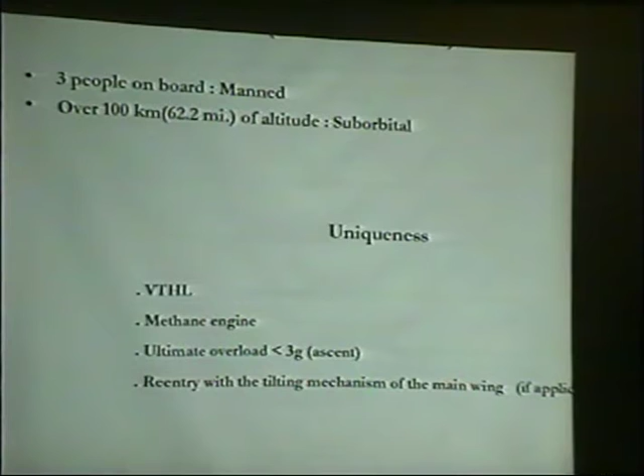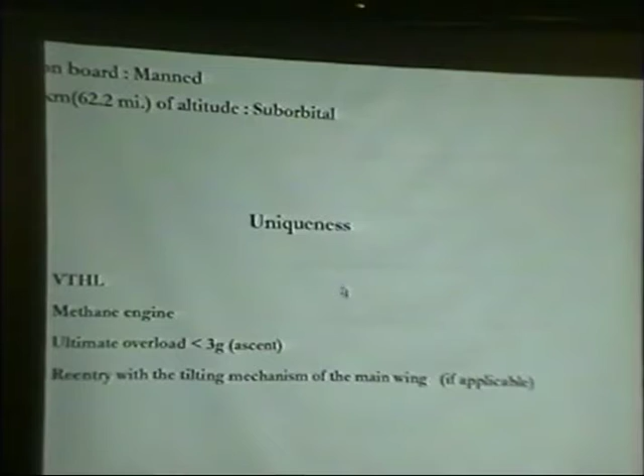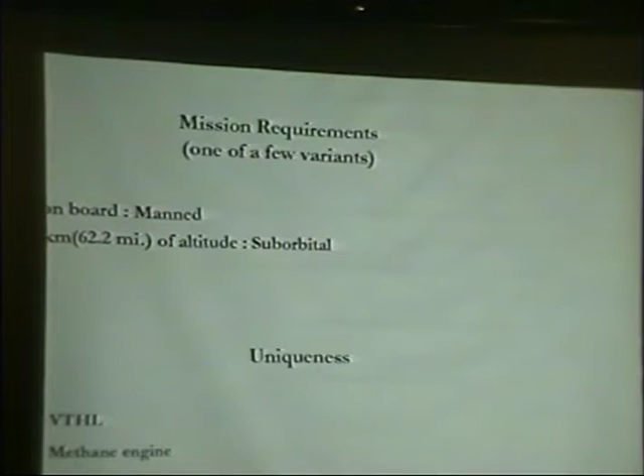We've got two mission requirements: 3 people on board, meaning manned, and over 100 kilometers of altitude, meaning suborbital. We extracted the uniqueness from that mission requirement: vertical takeoff and horizontal landing, and methane engine. The ultimate overload acceleration should be less than 3G, because we determined that value should be maintained since the man should be trained minimally for space tourism.

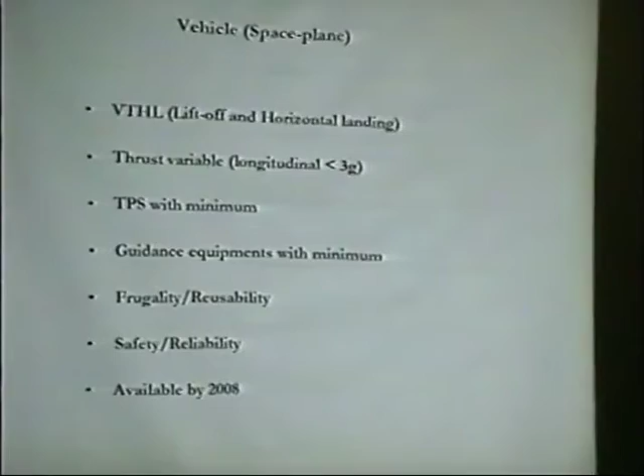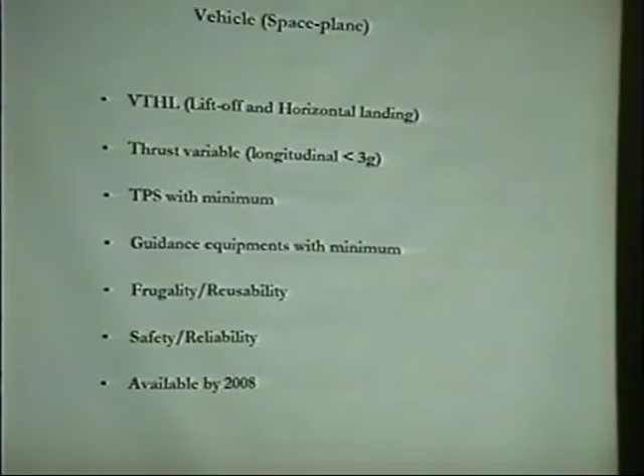A vehicle space plane is defined like this. As I commented, VTHL and variable thrust should be used in order to keep longitudinal acceleration less than 3G. TPS, if applicable, should be minimal, and guidance equipment should be minimal. For safety, reliability, and reusability, it should be available by 2008 - we should make the vehicle by 2008.

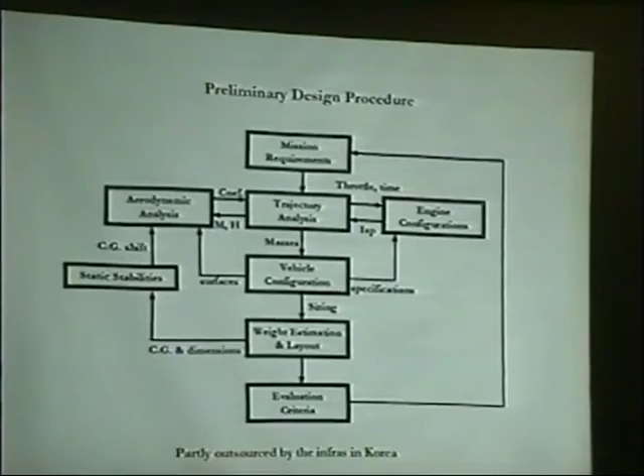The preliminary design procedure is like this. These tasks are done, but partly outsourced to infrastructure in Korea, such as academic universities and government researchers.

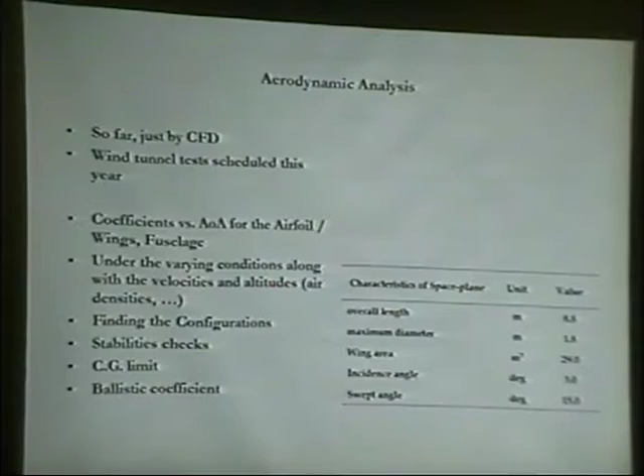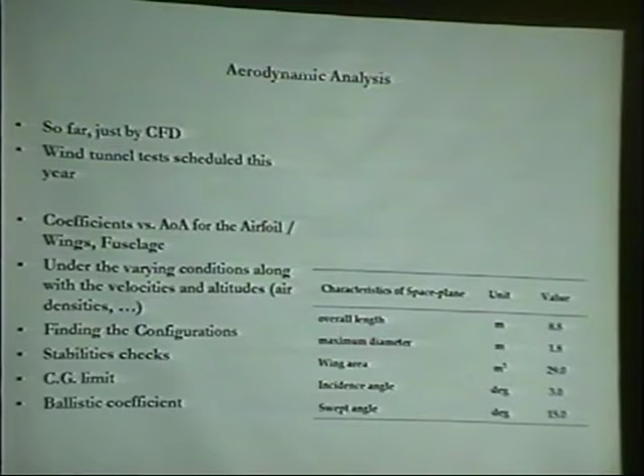Aerodynamic analysis was done. So far we have determined all the CD, CL, and CM versus angle of attack for the wing-fuselage configuration using CFD. A wind tunnel test should be made, because the CFD results don't fully estimate the real results, so we should conduct wind tunnel testing.

We are making a plan to test that model in real time starting this year. Here are the characteristics of the space plane: overall length, maximum diameter, wing area, incidence angle, swept angle. As you can see, the wing area is somewhat very large, because the vehicle must take off vertically and land horizontally on a runway.

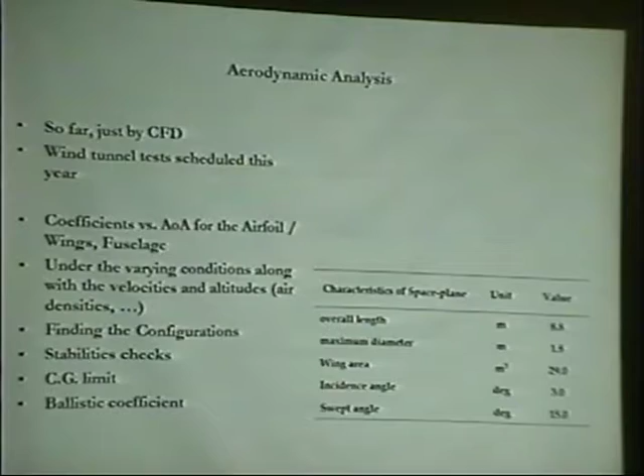So we have to confront some technological difficulties at liftoff. We thought this configuration would create a lot of drag during boost-off.

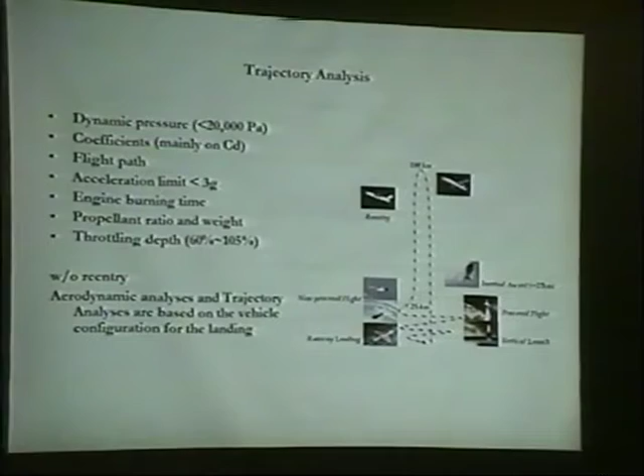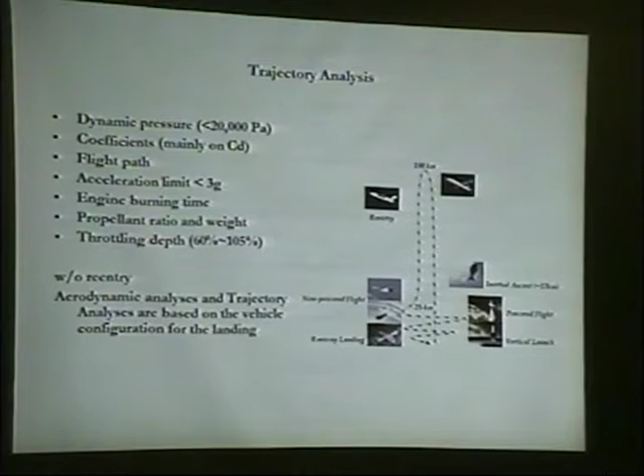Next, trajectory analysis. The trajectory analysis we conducted is based on 3 degree-of-freedom calculations. The dynamic pressure is limited to less than 20 kilopascals, and mainly based on CD we determined the coefficients. The flight path was calculated with an acceleration limit of less than 3G, which was maintained during the calculation. So we have two kinds of limitations for the calculations: 3G and 20 kilopascals of dynamic pressure.

Engine burning time is calculated by trajectory analysis, and propellant ratio and weight calculations were done. Throttling depth is 60% up to 105%. The 60% figure is mainly based on the acceleration limit. This was done without any re-entry calculations, and the aerodynamic and trajectory analyses are based on the vehicle configuration for landing. You can see the profile on the right side.

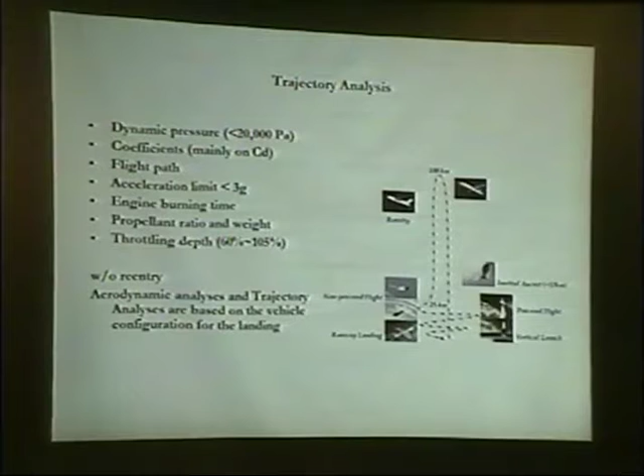This can be similar to some of the others. That analysis result shows that initial acceleration is limited to 1.2, and also the gross liftoff weight is...

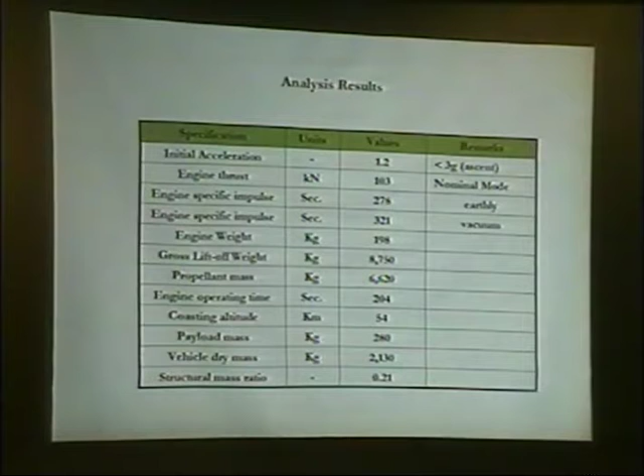8,750 kilograms. And payload mass is 280 kilograms, which represents the weight of the 3 people.

Weight estimation was done by Russian specialists - it was verified by them, but we did it first ourselves because we had no previous experience with that kind of flight. So we did this calculation and it was verified by them. It was very conservative, so there is some room to change that.

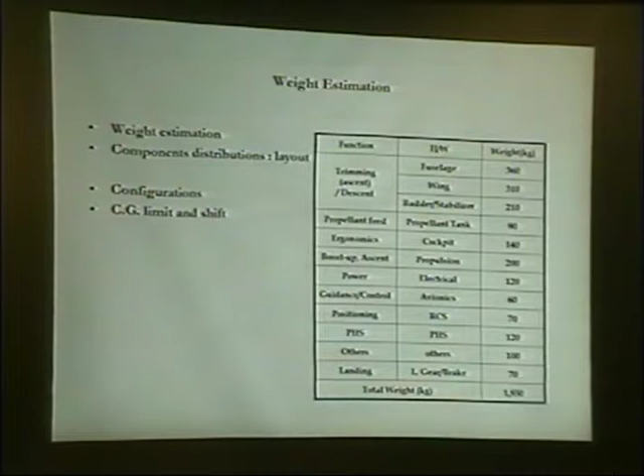The engine prototype weight budget was done, totaling less than 200 kilograms. Specifically, 198 kilograms was used for the calculation.

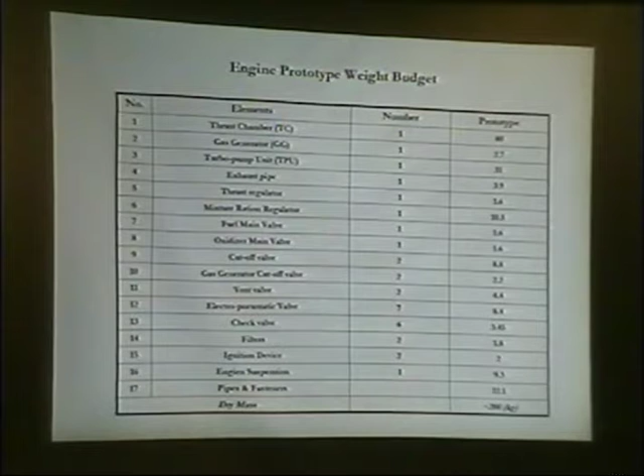Other features: the re-entry method was not determined yet, but we prefer tilting the main wing for deceleration, because that can lower the ballistic coefficient and reduce aerodynamic heating through a speed-braking effect. But we don't rule out the usage of TPS, thermal protection system, because it is relatively safe though heavy, but it's very expensive, so we don't prefer that option.

From a trim standpoint, initial acceleration should be lower, so that gravitational and aerodynamic losses would be higher. But we can trim the condition while boosting up, and the initial engine throttling is needed - meaning slower initial acceleration.

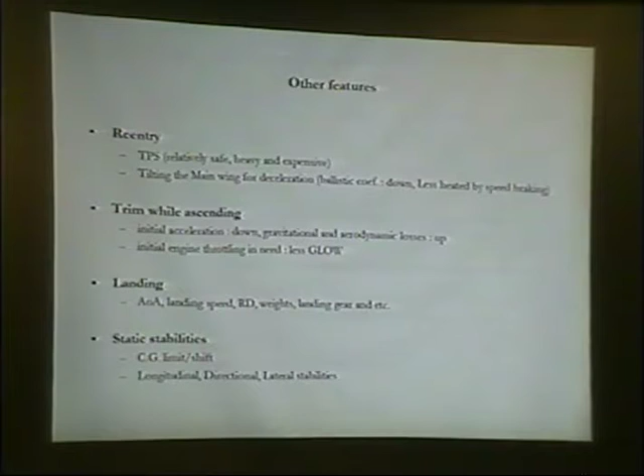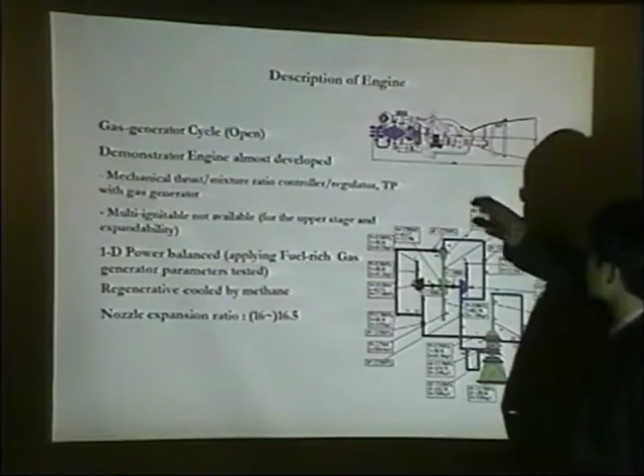Our engine is a gas generator cycle, so it's an open cycle. The engine looks like this - this is a general view of the engine, showing controllers, gas generators, servo valves, turbo pumps, and a highly reliable combustion exhaust chamber, which was tested over 200 times across 6 or 7 years.

So the demonstrator engine was almost developed. A mechanical thrust mixture ratio controller and regulator was utilized, so we expect it can increase reliability.

The turbopump with gas generator was not incorporated to be tested, but this year the turbopump with gas generator will be tested, in 2006.

Multi-ignitable capability is not yet available, but for the first time we made a demonstration of multi-ignitable ability, because it can be used for upper stages and expandable to other space missions.

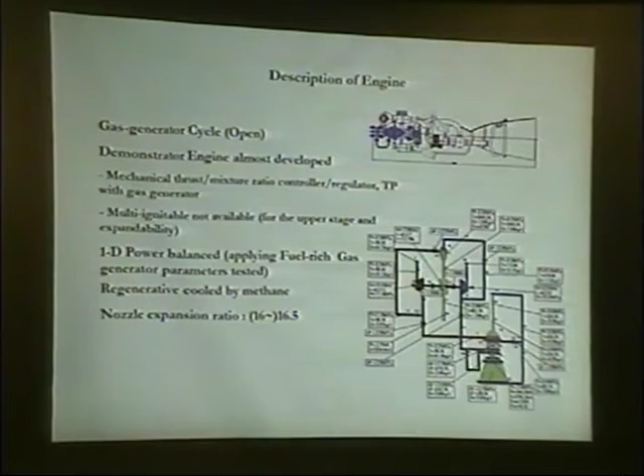Next, here we can see the results of calculation by the balance equation, including theoretical ISPs and expansion ratio as well.

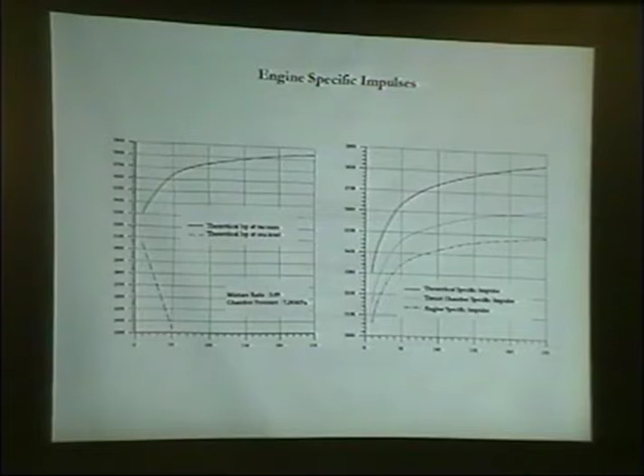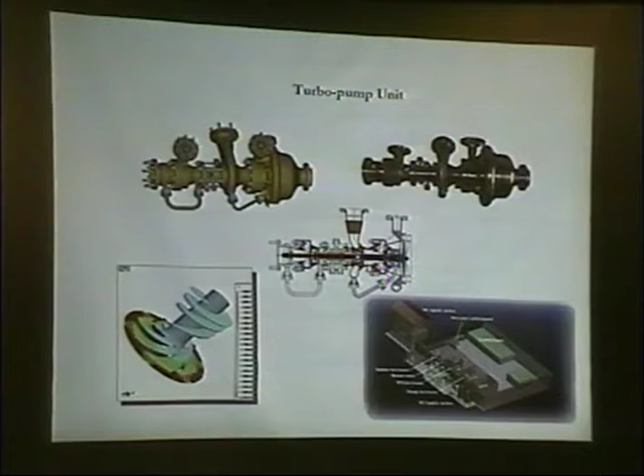Here we've got some prototypes for the test, and it was tested for 2 years in the test facilities shown on the right side. We've got flow visualization results, and a parametric study was done and tested by PIV and so on.

In the pictures below, the second one is for the pump, the third one is for the turbine, and the fourth one is fully tested.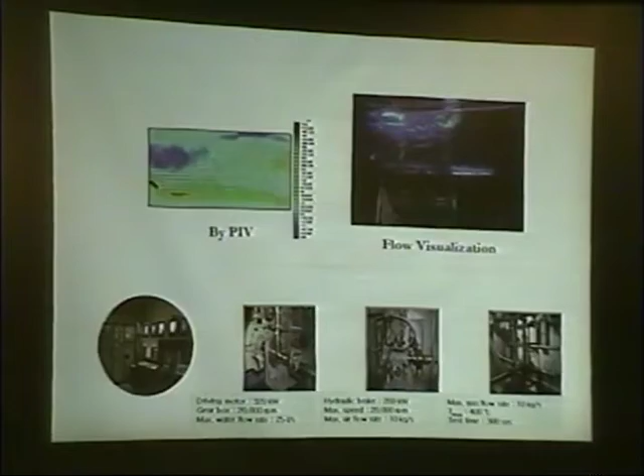Here we can say we have successful test results at the turbine driver 2, and we also had dynamical analysis and seal tests. Next page.

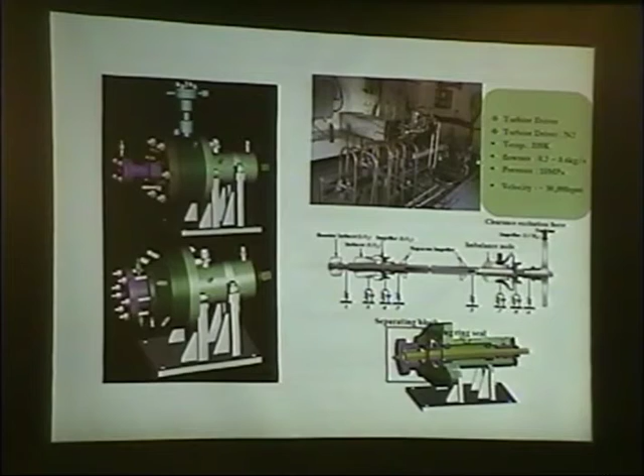Ecology, safety, reliability, economy, and reusability points: here we are using environmentally friendly propellants such as methane, so it should satisfy the present law in Korea also.

Safety and reliability are crucial for the rocket engine. Performance may go down due to penalties for safety and reliability, but we should confront this and solve the problem despite performance being down. Mechanical-type regulation and controlling devices are developed outside Korea and will be used for the real engine. We expect it will increase reliability level.

Economically, LNG or methane is so cheap, and so it has usability. Here you can see some cokes caused by methane.

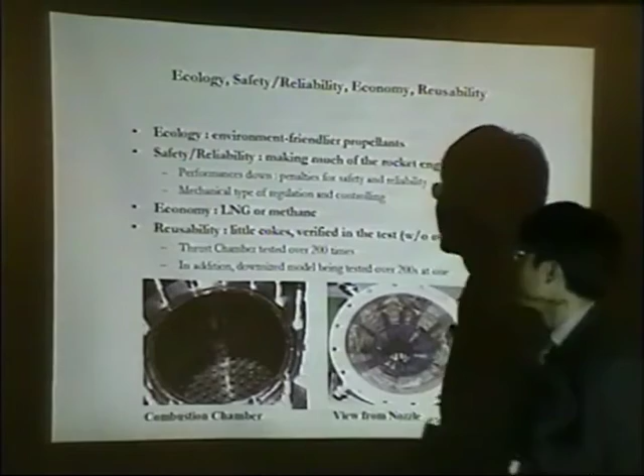These occurred at the initial stages of combustion chamber tests in 1997, but now we have no cokes there.

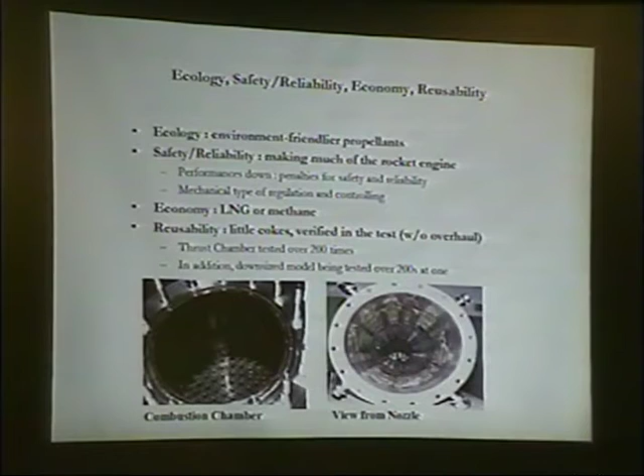The thrust chamber was tested over 200 times as previously documented. In addition, a downsized model of 0.1 ton, meaning 1,000 Newton thrust, is being tested over 200 seconds at one test time.

Conclusions: somewhat digressed, but I'd like to conclude that preliminary design works are conducted and introduced, and the engine is feasible enough. Development of the demonstrator engine is getting to the end for flight, so we can be partly private and government funded at present, and from now on we can also be fully funded in Korea.

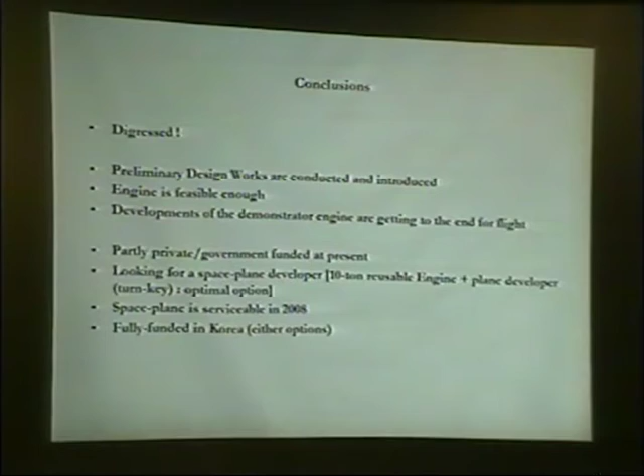If we can find a space plane developer - because we are the engine company, we don't have the specific specialties in designing space planes - we are looking for space plane development partners.

In Korea we have a lot of plane developers, but there's some problem because they are making a consortium for each project, so we need a turnkey-based airplane developer.

In the future, a dynamically stabilized airplane should be devised and optimized to cope with development changes. More compatibility and safety reliability are desired, and if those are satisfied, we can make a full engine that will be tested starting this year.

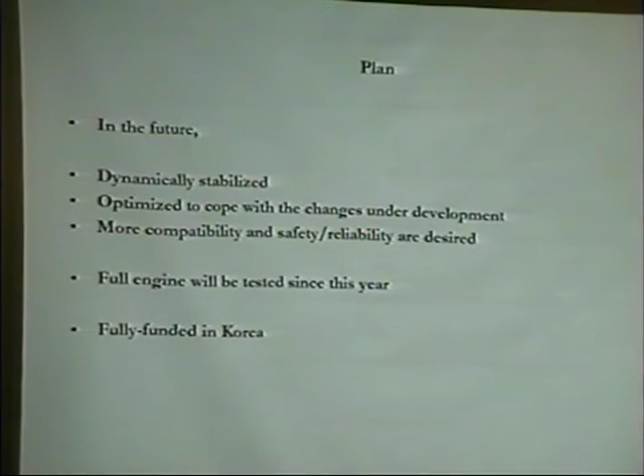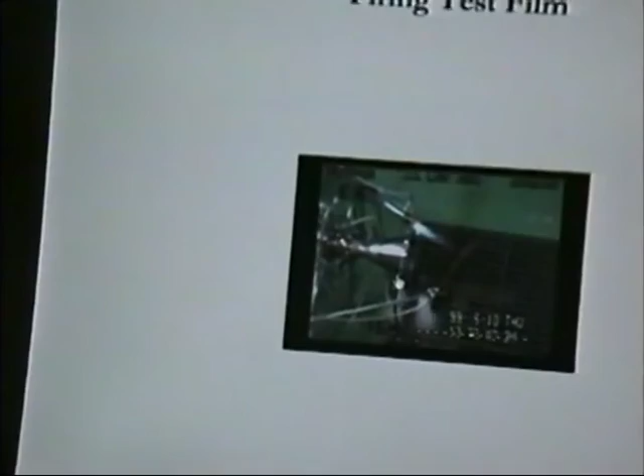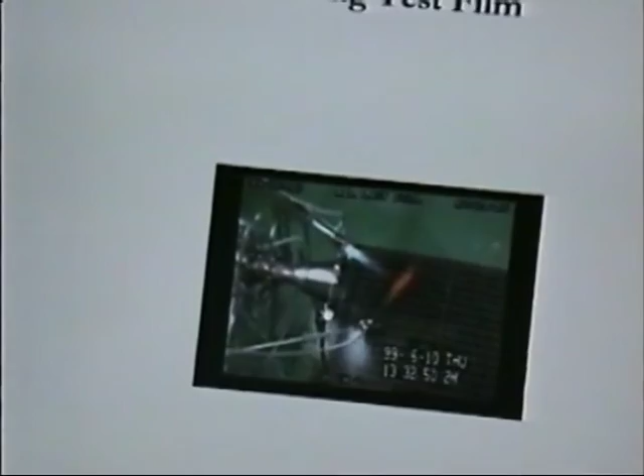What? All right, there you go, the engine's there. Okay, thank you very much. Thank you for your attention.

Are there any questions? Yes, Mr. Wu: do you have the funding you need to go all the way through building and flying the first station?